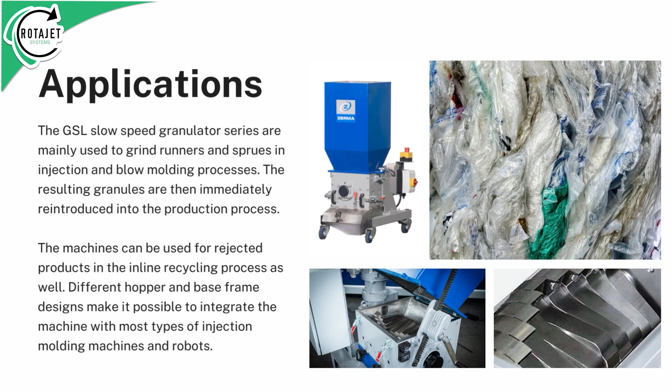Different hopper and base frame designs make it possible to integrate the machine with most types of injection molding machines and robots. The direct-driven staggered rotor special knife design makes adjustment unnecessary.

Easy access for maintenance and cleaning. Slow rotor speed creates less noise and dust. Easily customizable to suit different applications.

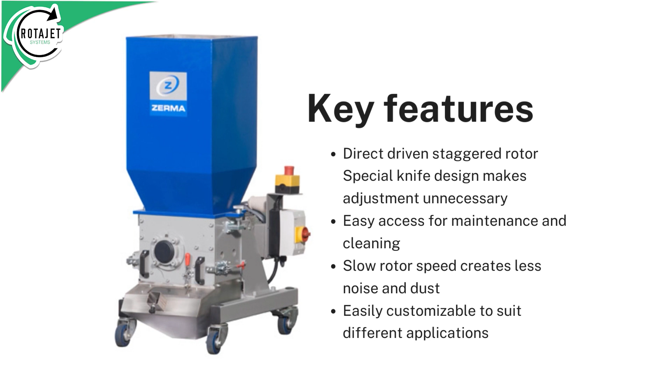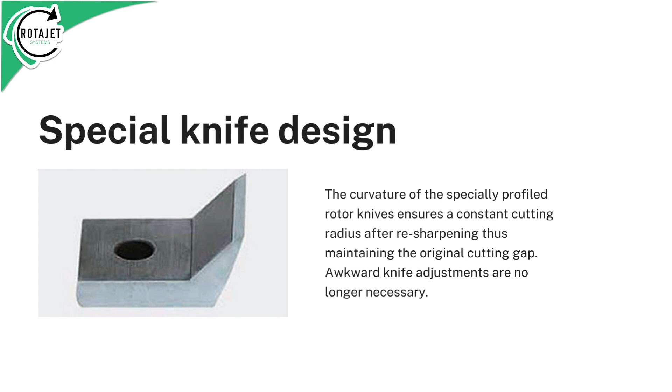The curvature of the specially profiled rotor knives ensures a constant cutting radius after resharpening, thus maintaining the original cutting gap. Awkward knife adjustments are no longer necessary.

Staggered rotor blades create an individual blade cut, thus increasing the cutting torque. All of the machines in this series are therefore suitable for grinding more solid materials and thicker walled sprues.

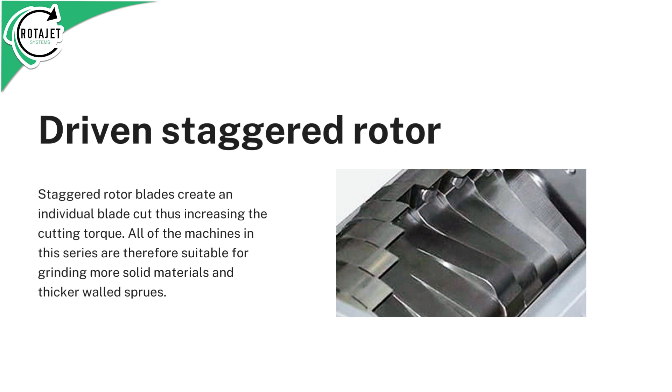The ZERMA Quick Snap system allows the lower front plate section to be easily removed for granulator cleaning. The lower front plate section is held in position by two sturdy lever clamps.

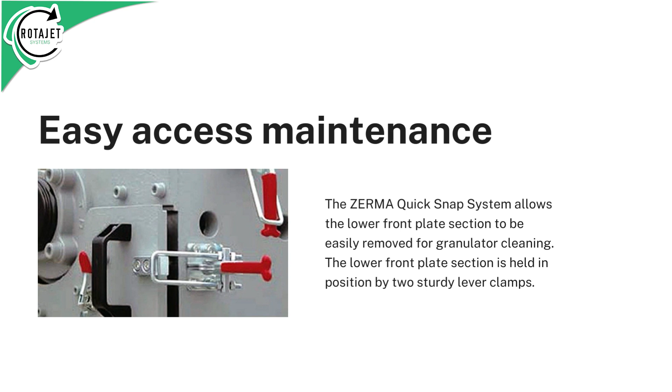All GSL models can be equipped with a built-in blower system in case a vacuum loading system is not available, or to transport the ground material to bags for storage.

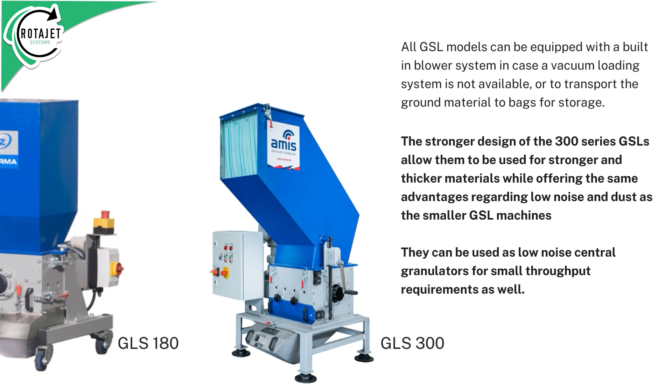The stronger design of the 300 series GSLs allow them to be used for stronger and thicker materials while offering the same advantages regarding low noise and dust as the smaller GSL machines. They can be used as low-noise central granulators for small throughput requirements as well.

The slow-speed granulators in the GSL 180 range feature a staggered 180 mm diameter rotor with a width ranging from 180 to 430 mm. In the 300 range, the width ranges from 400 mm to 800 mm.

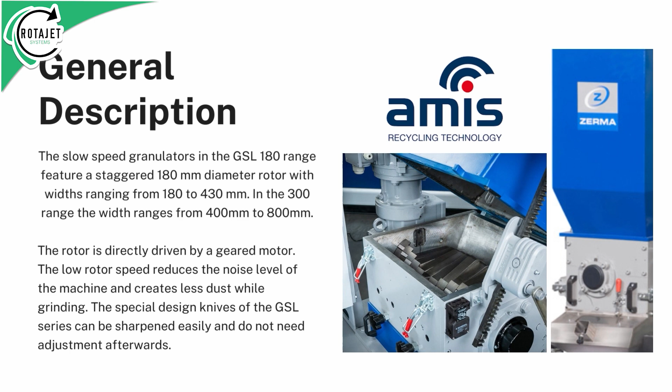The rotor is directly driven by a geared motor. The low rotor speed reduces the noise level of the machine and creates less dust while grinding. The special design knives of the GSL series can be sharpened easily and do not need adjustment afterwards.

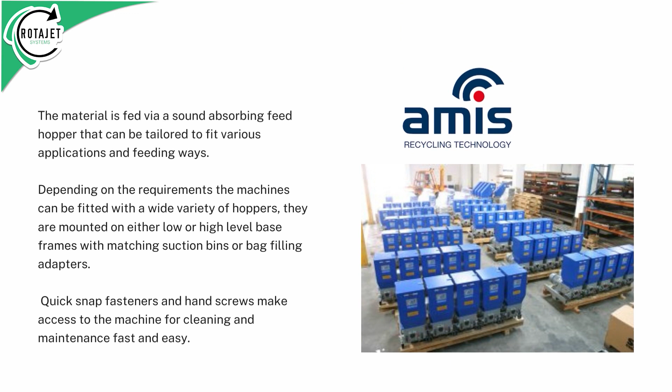The material is fed via a sound-absorbing feed hopper that can be tailored to fit various applications and feeding ways. Depending on the requirements, the machines can be fitted with a wide variety of hoppers. They are mounted on either low or high-level base frames with matching suction bins or bag-filling adapters.

Quick snap fasteners and hand screws make access to the machine for cleaning and maintenance fast and easy.